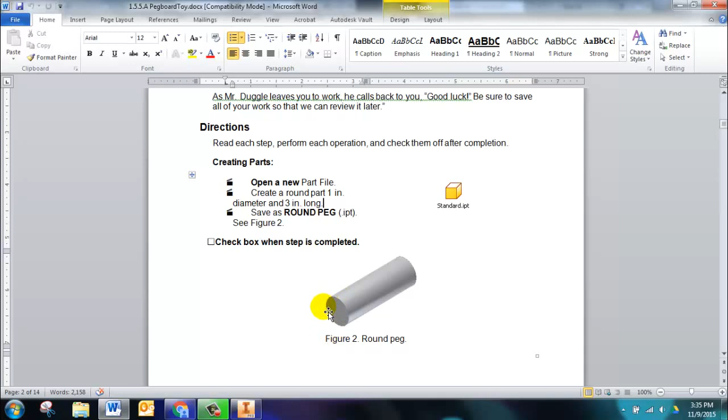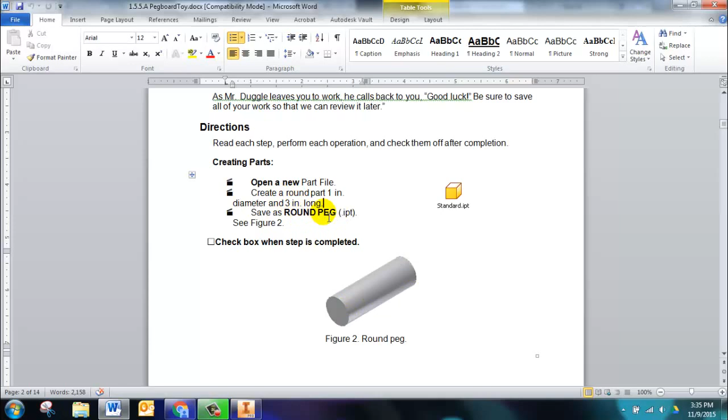And our part is going to be a round peg. Now let's look at that. Did you look at it? Okay. So we're going to draw a circle that has a diameter of 1 inch. And then we will extrude that circle 3 inches, and we will name it round peg. So let's go back to Inventor.

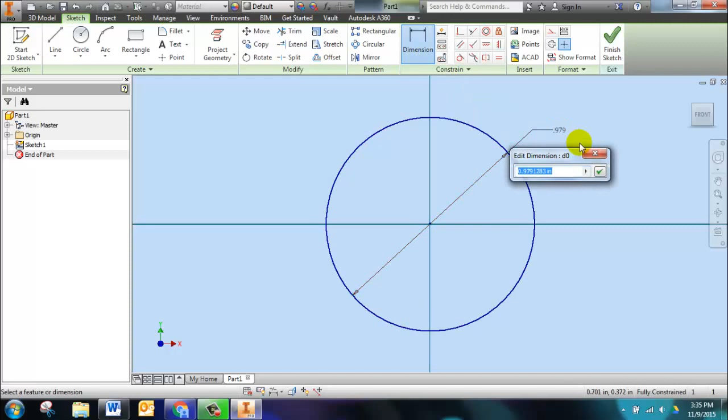So Start New Sketch. I'm just going to use the XY plane. And I'm going to click on Circle. Grab the origin right here and drag out a circle close to 1 inch. Dimension, and change it to 1. Finish our sketch. I'm going to zoom out so we can see it and do an extrusion. It should see the circle, and our extrusion distance is 3 inches.

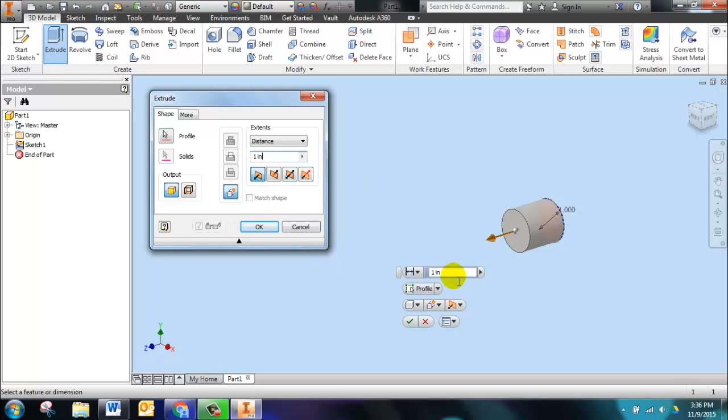By the way, did you know you can type it right here? Or you can type it down here in this little menu that floats around. A lot of people have the luxury of having 2 monitors, so they'll actually sometimes have these menus off on the other monitor instead of on their drawing space. That way you have plenty of room to draw. So anyway, 3 inches, and then green check mark, and we're done. We do need to save it.

Did you sign up for the Learning Lab for curriculum mapping and other data? I'll be having it in my office if you signed up for it. So you can join us. My apologies, students. I apologize for the interruption there.

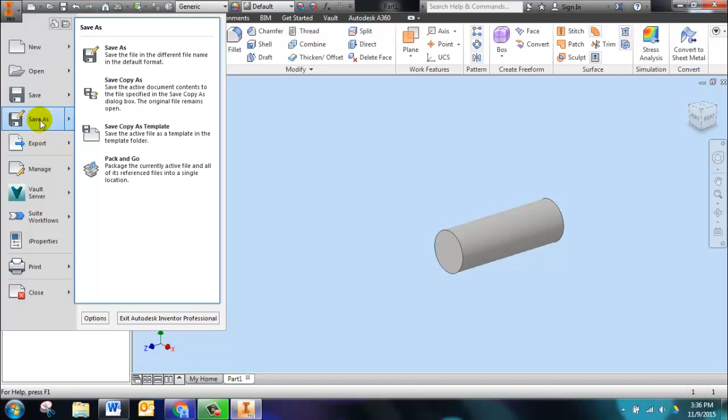So we're going to go to the Application menu, and we're going to click Save As. And we were told to save it as Round Peg. Click Save. Congratulations, you have finished the round peg portion of Activity 1.5.5. Please come back to visit the square peg video tutorial next.